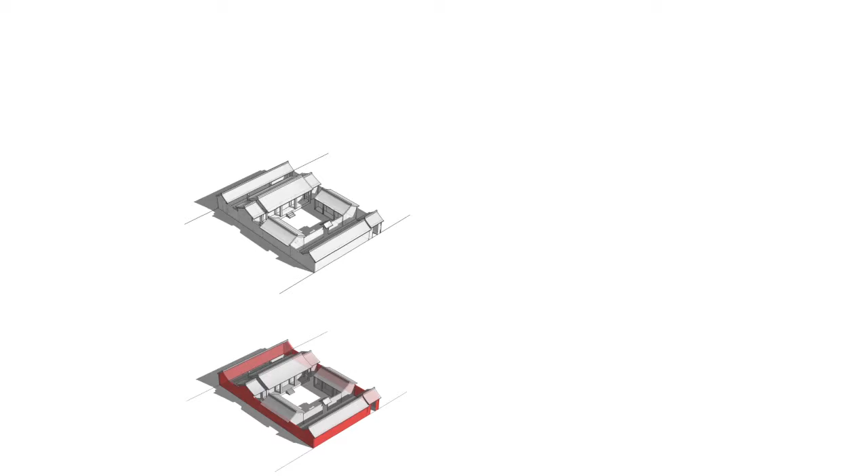Yet if we look at this fabric more carefully, this is the hutong today, and even compared to the 1750 Qianlong plan of Beijing, it's difficult to find this figure. Can you find that perfect rectangle? The urban fabric of the hutong was not and is not a replication of rectangles as units.

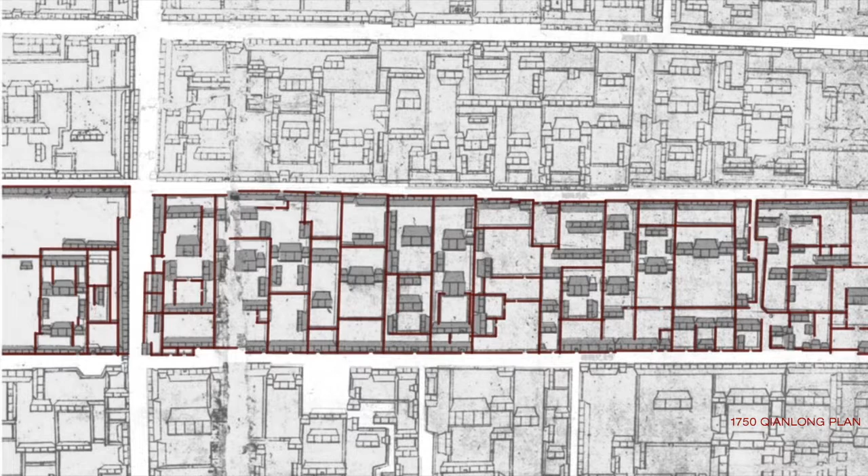It is a field of pavilions organized in relationship to sunlight, then infilled with walls that shift over time to form family compounds in relation with neighboring compounds. This organization for sunlight is a loose or open relation of pavilions. Regardless of how the garden walls are changed, sunlight always enters the fabric.

As a field, this reflects the reality of the ideal family. It reflects that the ideal family was not always possible, and in fact, the compound walls could shift to accommodate the changes in lifestyle.

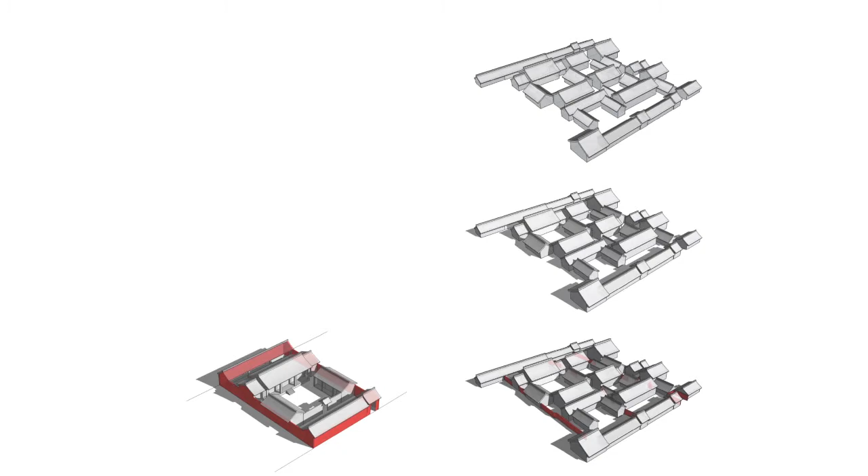The city's urban legibility is informed by these open fabrics. Despite the wall-lined streets and alleys that characterize old Beijing, Beijing is easily navigated through a directionality of longitude and latitude and in relationship to city center.

This strong directionality is formed by the courtyard fabric, which expands easily in the east-west direction, but must be more frequently interrupted in the north-south direction.

The lesson? There's a reciprocity, a relativity between the smallest unit of the urban fabric with the identity and legibility of the entire city. There's a reciprocity between public and private realms, and between inside and outside.

These are critical field conditions that we are losing the competency to design, and for which our urban design tools too frequently ignore.

Shanghai. What we see now is a move towards the design and development of the components of our cities. The buildings, the parks, streets and highways, they're all becoming objects. The debate about figures and fields accelerated in the mid-20th century, of course.

In response to urban fabrics which had become overcrowded and unsafe, CIAM produced a manifesto for rational cities in which streets were hierarchic and functions were segregated. Dwelling was isolated in towers and distributed within parks to ensure that urban centers could be both dense and sunlit.

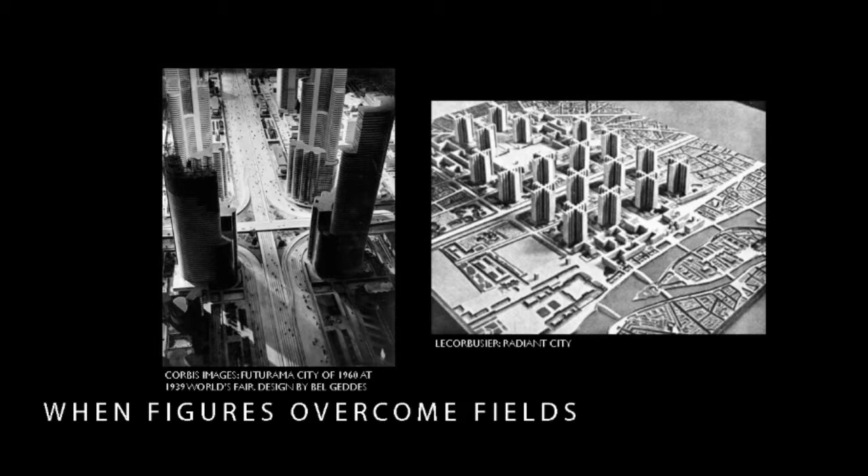The lures of mass production, automotive and building technologies, coupled with the imperatives of health and safety, overrode the concern for urban legibility and locale.

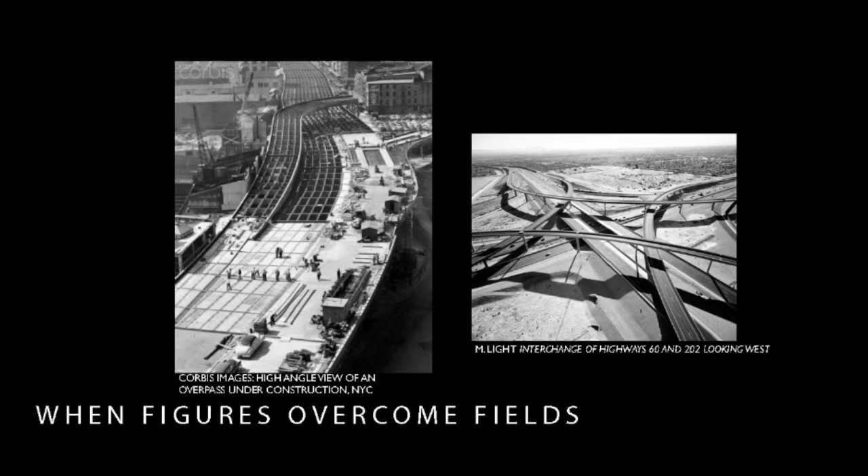This tabula rasa approach has been adopted by generations of architects, planners, and policymakers, especially during waves of large-scale reconstruction, as evidenced in post-war America and today in contemporary China.

There was, of course, a backlash to this approach. With CIAM, the disagreement about the charter led to the emergence of Team 10. In the United States, Jane Jacobs put forth her famed rebuke of modernist planning principles.

In her book, Death and Life of Great American Cities, the very first line reads, 'This book is an attack on current city planning and rebuilding.' She used New York as her primary case study, deriding the figural monotony, fragmenting boundaries, and the loss of the fine-grained and diverse social and economic complexities necessary for a healthy city.

While the debate over what constituted good cities continued, I think the culture of object building evolved. A convergence of immense concentrations of capital, an assumption about cheap energy, and vertical technologies fostered a building culture dominated by icons to corporate and individual wealth.

In 1978, Rem Koolhaas also used Manhattan as a case study to describe urbanism and what he called its terminal stages. Terminal stages—it's the end game, it's like cancer. He said buildings were so large they become automonuments, even if they do not deserve such symbolism.

He described urban living as lobotomized, splitting inside from outside, block from block, public from private.

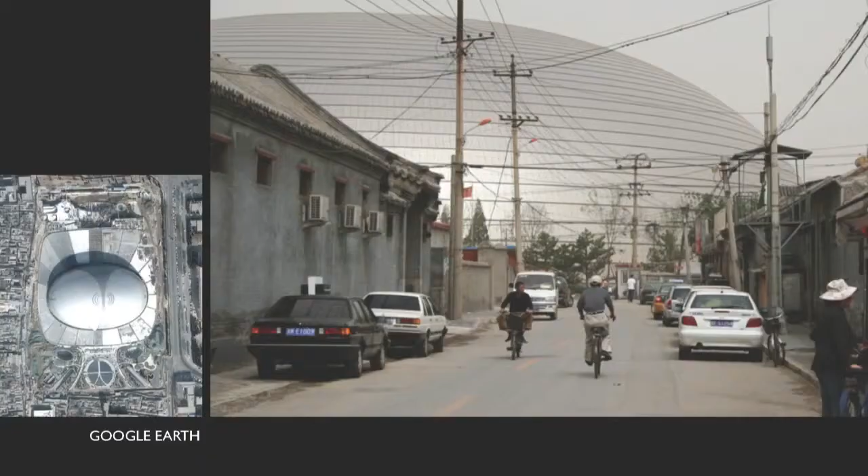So, while traditional settlements as fields emerged from cultural practices that no single identity could claim, 20th century development commodified building as individual brands. To overly caricature: governments wanted monuments, corporations wanted icons, architects want recognition, and developers want brand identity.

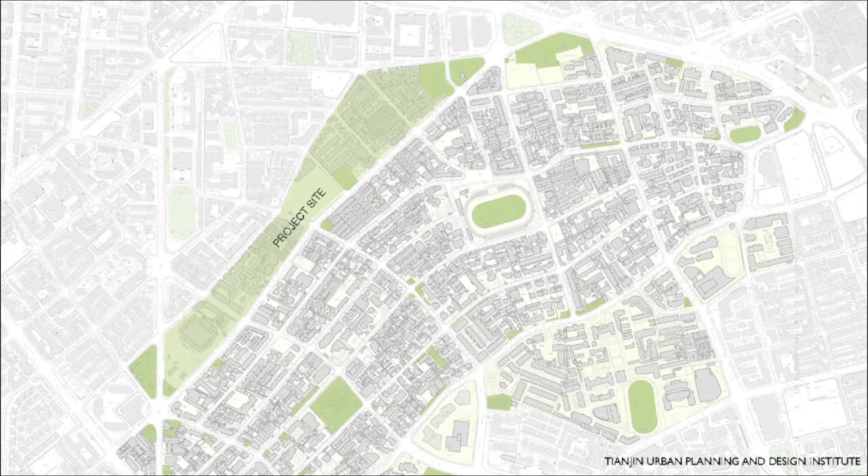The goal was to develop an urban fabric that reinforced the legibility of the city, that served as a transition between the historic district and the urban towers that surround it, and that revitalized the historic district with mixed-use activities.

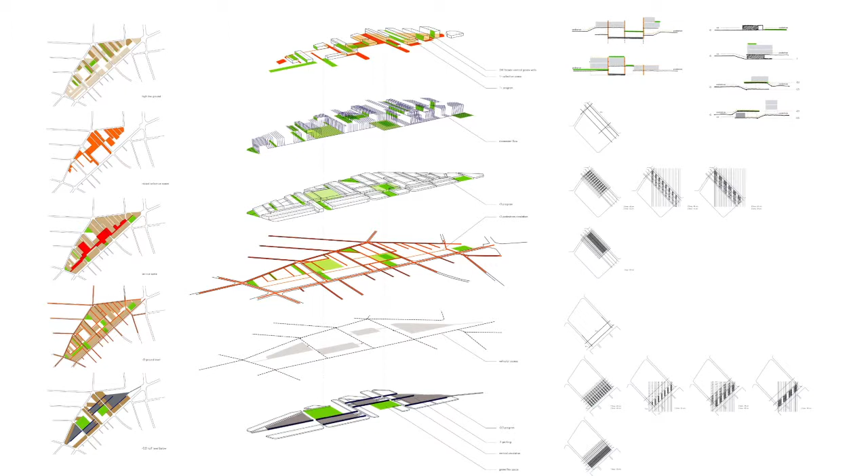In this case, what I'd like to illustrate is how relations were described and used as design parameters for collaboration among designers. The experiment benefited from having 14 willing designers prepared and inclined to use systems to describe relations between their individual designs. In developing the parameters, every system of the field was a configuration overlaid on other systems.

You're looking at some of the initial studies. We began by assuming that any urban armature should begin with passive strategies and then apply technologies, and that every system operates in an optimum that differs from other systems. So our ambition was to integrate systems, not make them closed loop.

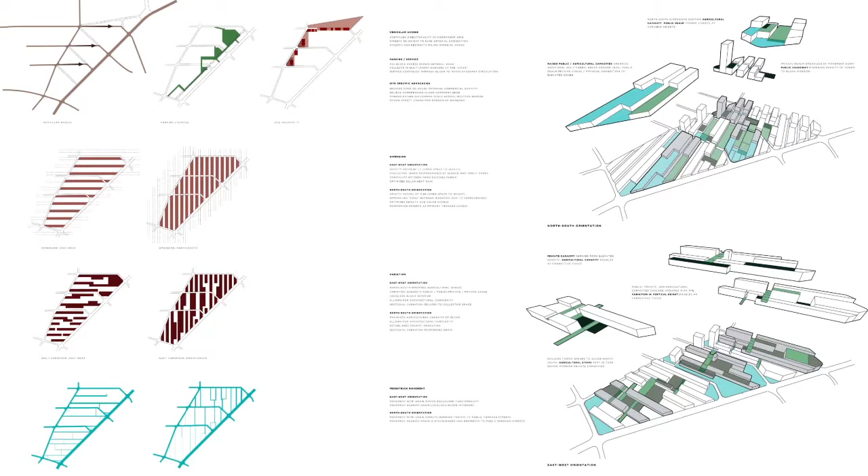Here's what we came to agree on as the key systems that were the initial starting point for the design guidelines. Very simply, they were walls, water, wind, and sun.

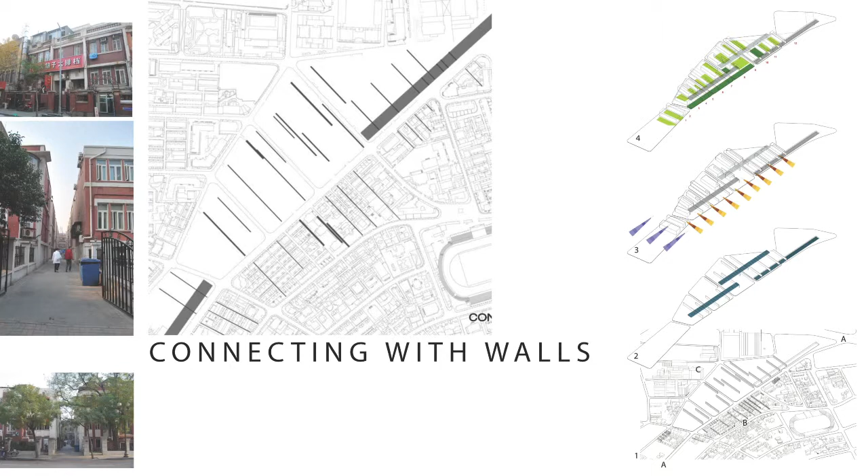First, connecting with walls. In Wudadao, we extended the walled characteristics of the historic fabric, which is to the bottom of the image, into the site. A field of demising walls, long and short, in the historic fabric are extended onto and transformed on the project site as a field of wall zones. These are some of the design interpretations.

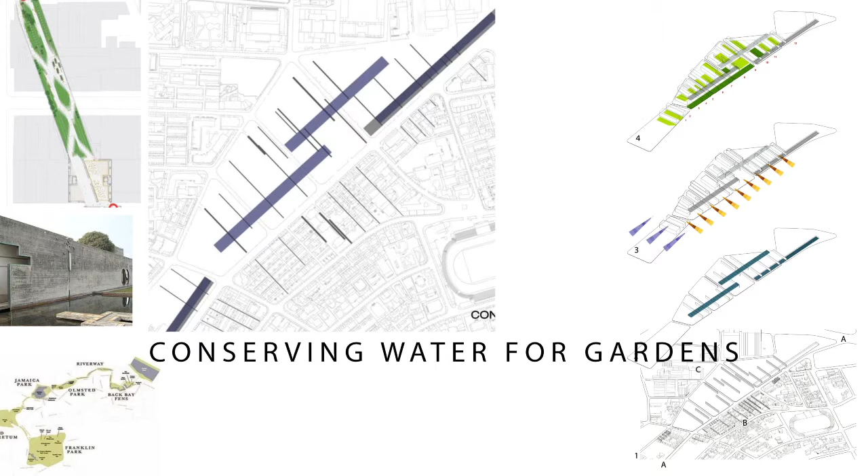Next, we looked at stormwater. Tianjin receives 70% of its annual rainfall during the summer, so flooding and water shortages are a recurring pattern. Remediation through in-ground water systems is made difficult by impervious soil conditions. As a result, stormwater is managed above ground at multiple urban levels.

An elevated collection system provides a new ground for activities internal to the site that could be developed as a green belt from the retained water. Again, here are some of the design interpretations.

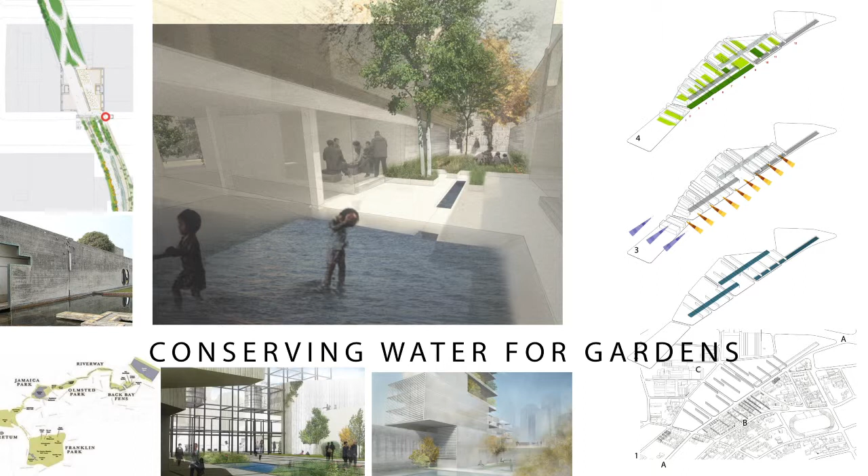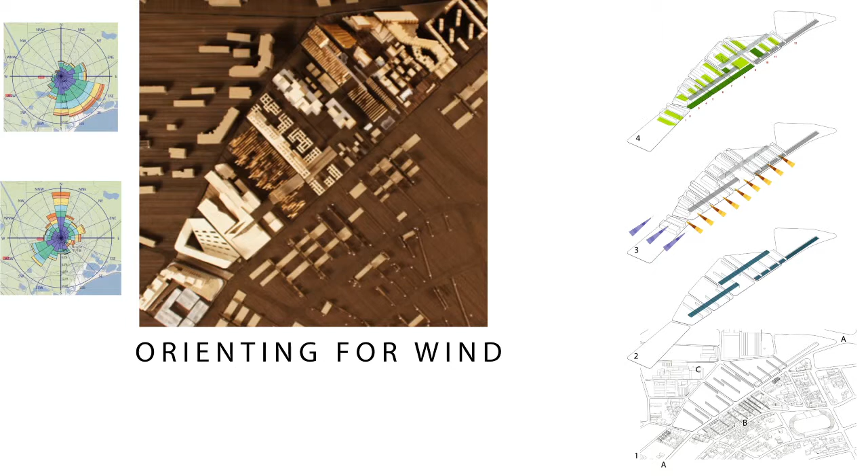Another goal was to provide natural ventilation across the site, ensuring summer breezes and blocking winter winds, especially to the residential units. And last was permeability of sun.

Revitalizing Wudadao required increasing the number of people living near the site. Therefore, a large portion of this fabric needed to be residential, requiring that parts of the site meet the Chinese sunlight code. On the bottom, you can see the sunlight intervals that were introduced, where building masses were paired with shadow zones, so that each designer was responsible for the shadow his or her building cast on the remainder of the site. The more impervious the building, the less ground development was possible.

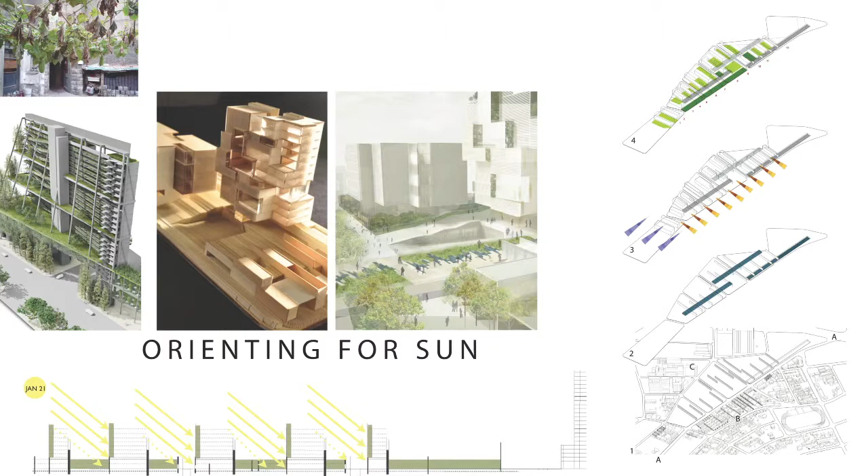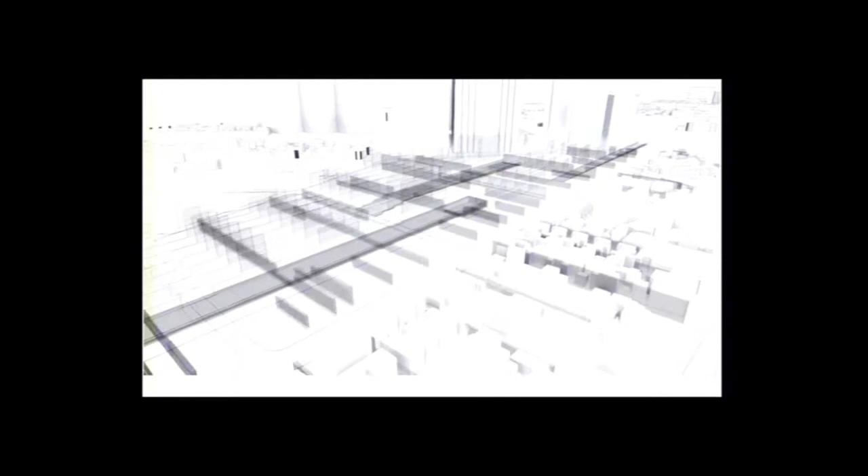With the field parameters in place, designers then worked individually. In fact, they barely talked with each other because we had hardly any time left in the semester. But very quickly, and with very little need for discussion, the major continuities of the site emerged with what I think is a finely woven integration of public and private spaces, where no space was left over or unused.

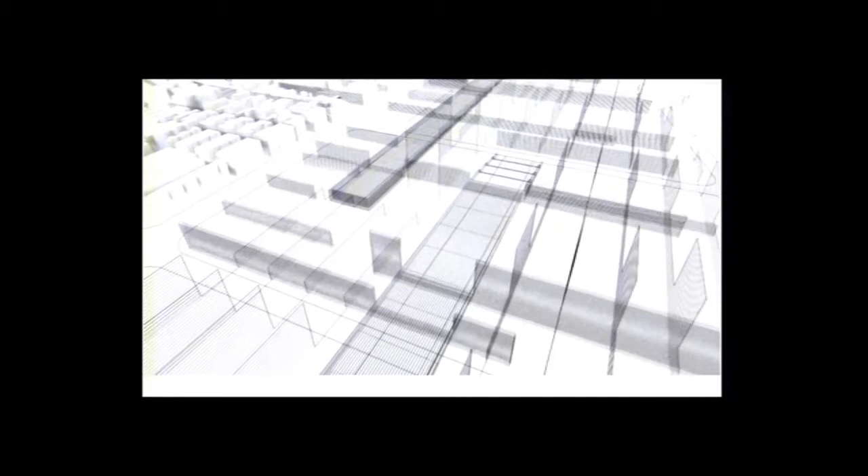My second illustration is a canal village on the outskirts of Shanghai. This was a competition sponsored by the Shanghai Qingpu government.

The competition brief called for schemes that would bring back the awareness of natural evolution of man-made habitats, inspire a new paradigm of city development, one that is neither urbanism nor suburbanism, and provoke, and this is my favorite part, a dialogue between Chinese heritage and contemporary living.

For a nation that's been busy destroying large parts of their urban fabric, it was a relief to hear that they were interested in trying to maintain that.

What I'd like to illustrate here in relation to the potentials of field urbanism is how to read a locale, its heritage in this case, and extend its lessons to build contemporary urban fabrics.

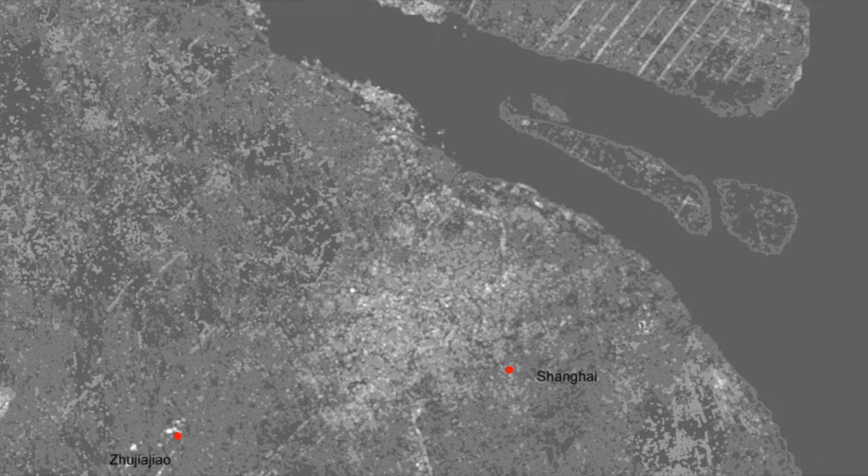Like Shanghai, this project site sits in the Yangtze River Delta. To make productive agricultural fields from these flood-prone lands, the region is a system of ponds and canals with dikes and levees to control drainage and provide irrigation.

The land is divided into long, thin parcels that radiate perpendicularly from the edges of the canal. It is a low-tech, decentralized system, doesn't require lots of maintenance, and enables good overall agricultural and drainage performance. It's been working for centuries.

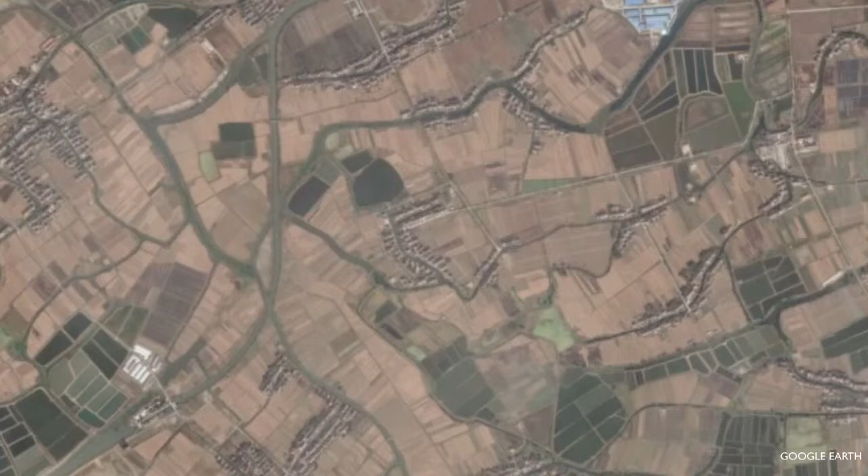A distinctive group of towns and villages has grown out of this landscape. Zhujiajiao is one of these villages. As metropolitan Shanghai develops, this landscape now faces the pressure of suburban development, all too familiar.

By now, I hope it's becoming explicit that we need to be able to read local relations as systems. This affords designers the knowledge and tools to both connect to and extend the unique urbanism of a place, and to describe the interwoven and nested interior quality of a fabric.

What this project will show is that urban systems and architectural systems need to be mapped as a thick mat, as overlays both at a variety of scales and at the same scale. So here are a series of mappings of the historic center.

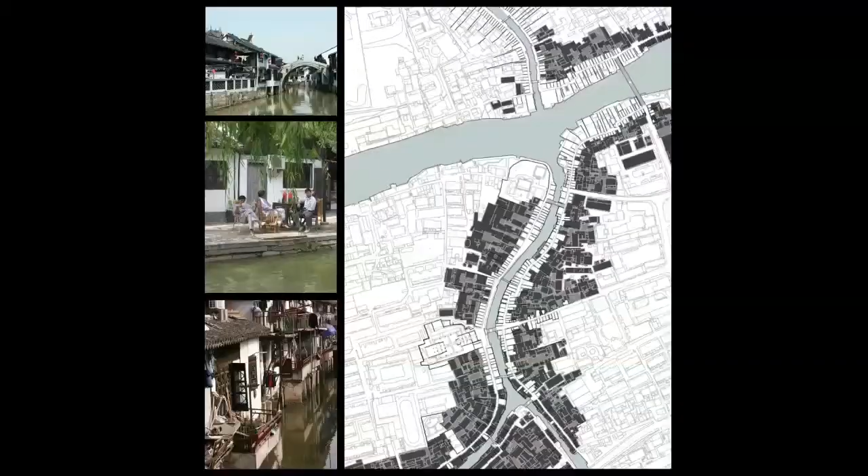This illustration shows the public perception of the village, much like the Nolli plan of Rome. Here you see the party walls that are direct extensions of the levees that radiate from the canals.

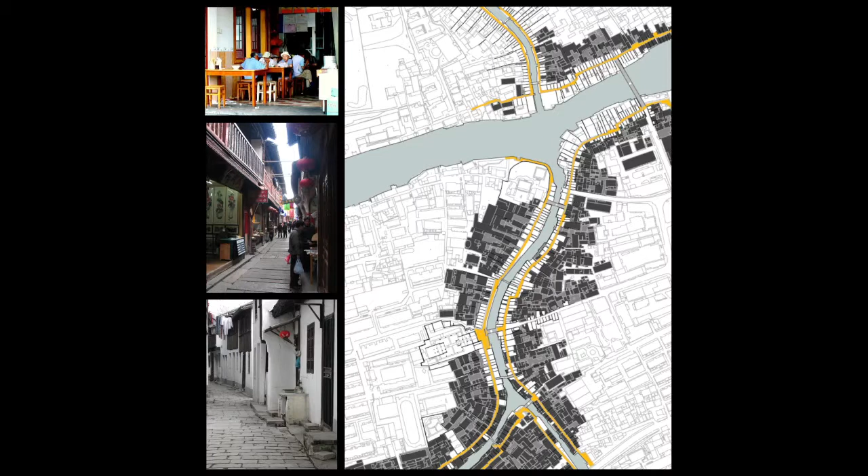Here in yellow you see the public access highlighted, and you can see that public access runs parallel to the canals.

This is the residential access. It runs perpendicular to the water, along the party walls, through an alternation of buildings and courtyards. So the residential experience is very much to and from the water, public experience parallel to the water.

And deep in the fabric are the large houses and temples, the buildings that are distinctive objects or figures, yet integrated into the fabric.

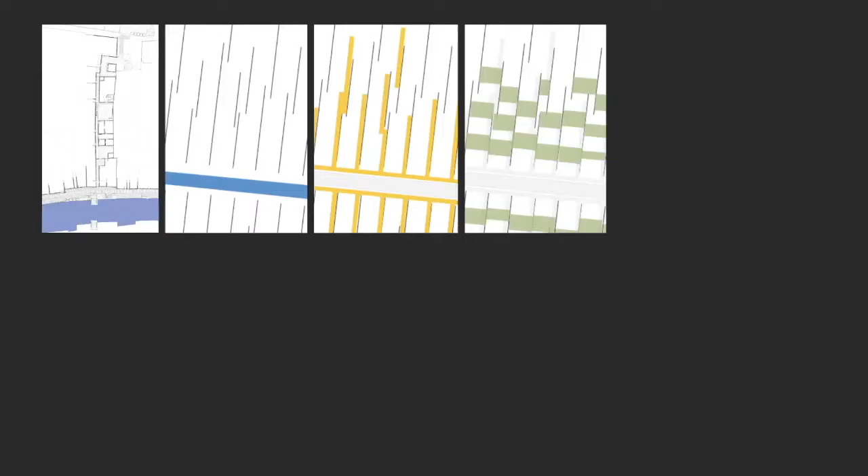Here's a set of diagrams exploring the same set of systems at a local scale. Our design goal is to introduce contemporary ways of living by extending, transforming, and adding spatial practices that are unique to this landscape. Again, I'll just show this looking one system at a time.

Here what you see is the primacy of water. A new dwelling fabric needs to maintain the stormwater pattern of the region. The walls are extended as zones and the increments are widened to accommodate new densities. Major public access continues to move parallel to the canals, and the neighborhoods and their access continue to radiate to and from the water.

Sunlight in the historic field is a checkerboard pattern, ensuring sunlight and air in what is a very temperate climate. What we discovered is the same pattern fails when we had to increase the building heights to change the density.

So in this case, we had to transform the built and open pattern into alternating strips that met the Chinese daylight code. The preference for south-facing housing is provided at the scale of the unit rather than at the scale of the building. And then new services like parking, fire access, garbage, servicing were layered into the field to intensify the experience of the water.

This scheme introduces servicing as a topographic system, again a new elevated ground. Community activities take place on the new ground with parking located below.

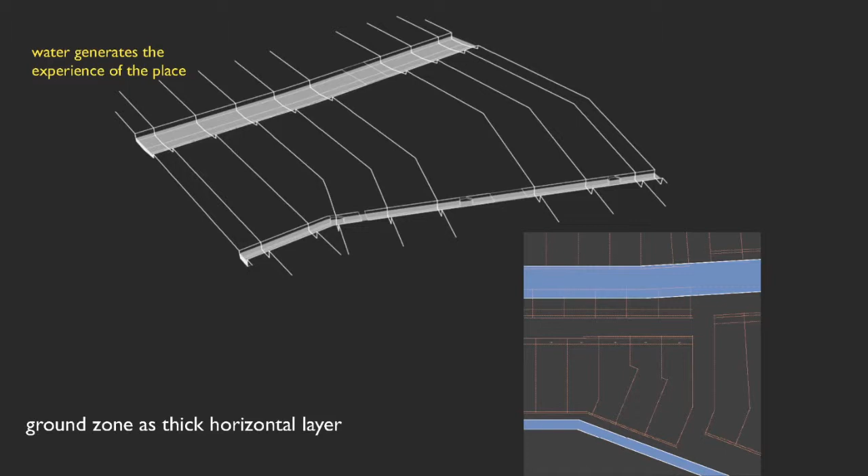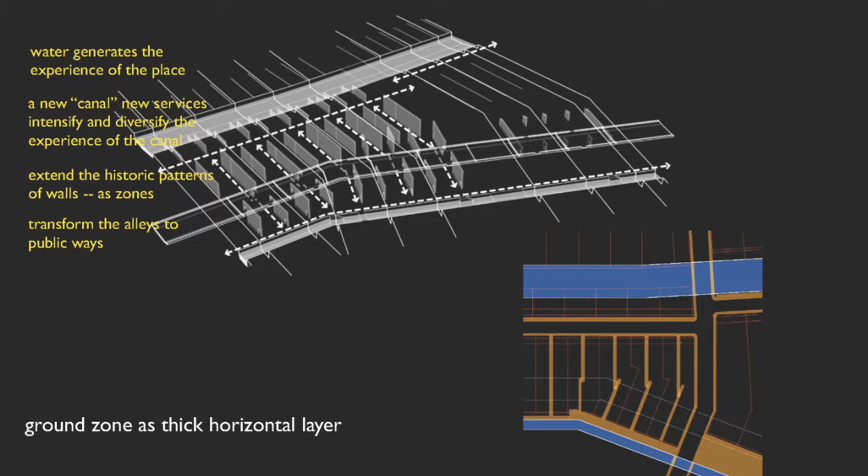One, there's a multiplicity of systems that connect local with extended sites. Two, the systems are a thick mat that describe the reciprocities between large and small, public and private. The systems then are guidelines that allow building form to emerge, describing the key attributes to be shared, but provoking variation, both for initial collaboration and over time.

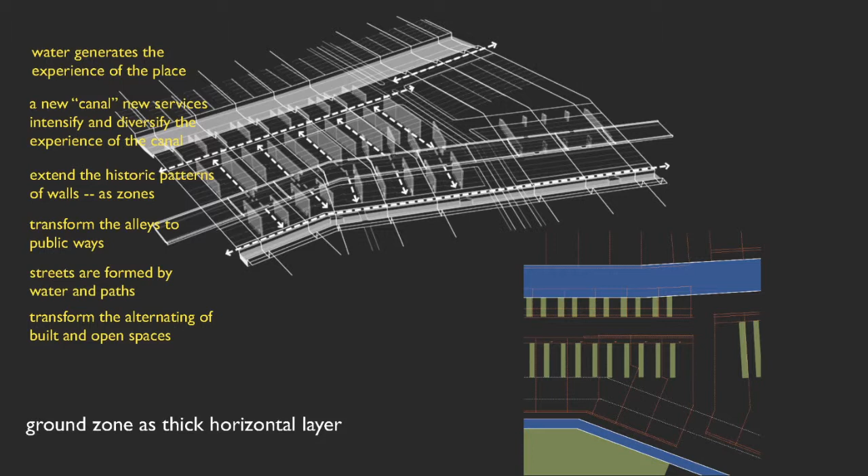As a result of describing the relational conditions and masses at sizes smaller than the building, we were able to develop an urban fabric, one with richly woven experiences at all sizes, integrated with the water system of the landscape, offering variation and choice for the resident, and allowing designers to do more than decorate the outside and fill out the inside.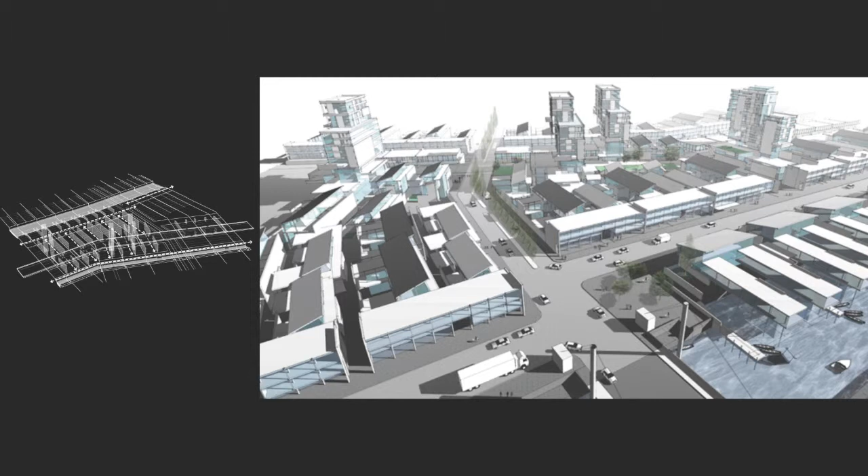The last case study is in Hanoi. You'll see the work of two teams of students for a competition sponsored by the National University of Singapore as part of their Vertical Cities Asia competition. The intent of the competition is to develop new paradigms for high-density living. In this case, they set a goal of 100,000 people in 1 square kilometer with a theme of urban farming, and a site, unfortunately, not in Hanoi but on the outskirts of Hanoi, so it's a greenfield site.

While there's not enough time to go through the details of the project, what I'd like to illustrate with this last case study is the reading of relationships already embedded in the control of water, again in an agrarian landscape, and their transformation into relational design parameters.

This time I won't describe all the field parameters, but instead the resulting form and how the systems underlay the urban fabric.

We began the project developing both the quantitative and qualitative metrics. What did the numbers of the brief mean in relation to known places and the culture of Vietnam? We discovered that the numbers, 100,000 people in 1 square kilometer, did not imply that the form of the city had to be in vertical object containers, and that strong horizontal development was possible.

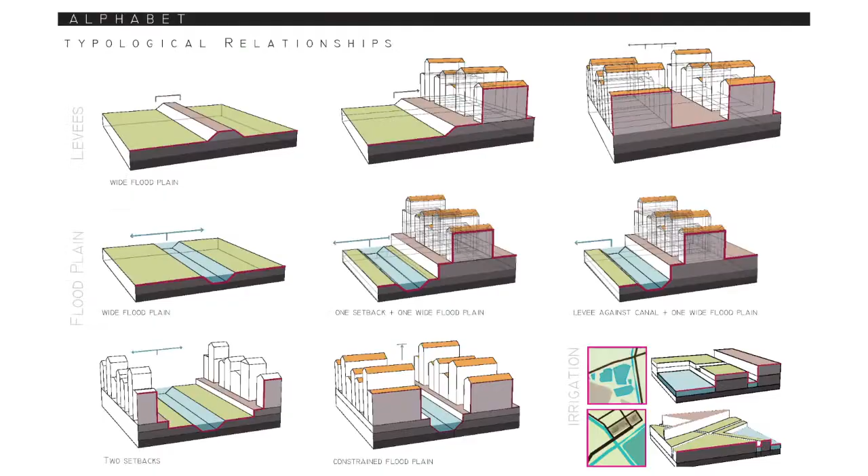We studied the form of housing in the rural landscape as well as in the city. We looked at crops and the food chain. We looked at stormwater, the control of the flooding, the watershed, and the existing agrarian systems.

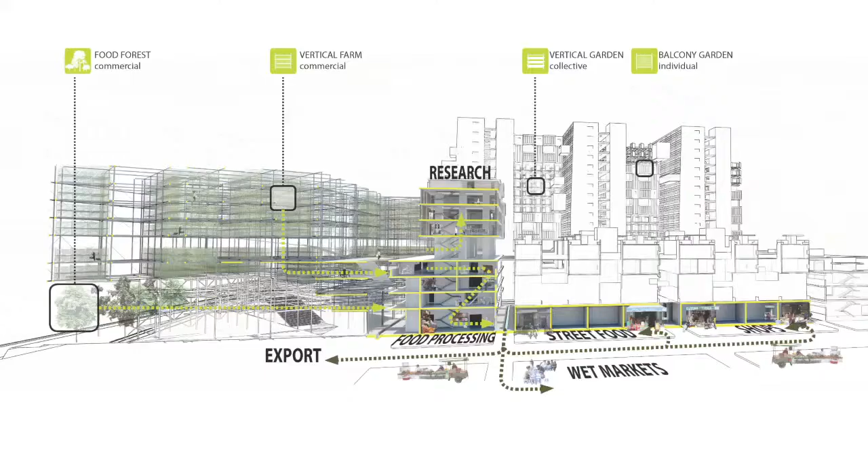With all these examples, I hope I've illustrated alternatives, both representational and systemic, towards designing good urbanism through using fields as well as figures.

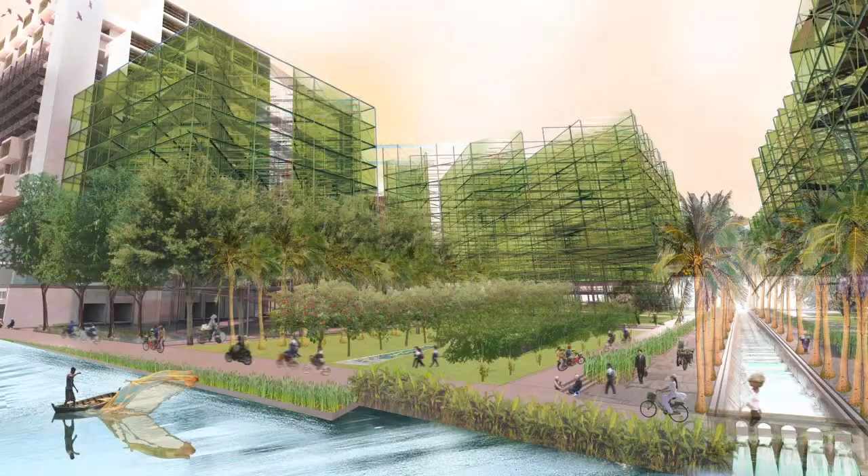Aldo van Eyck said, good urbanism is when the experience of the city makes you feel inside, even if it happens to be outside.

We need to consider the impact of design interventions at all scales, from the largest to the smallest. In this way, no space is left over, a no man's land between built projects. I believe good urbanism is local. It's about being somewhere, not anywhere.

I'd like to conclude, since I knew I was first today, with questions for the rest of our speakers and for you as students of urban design. At least for us, these are the questions that emerged from these projects we worked on.

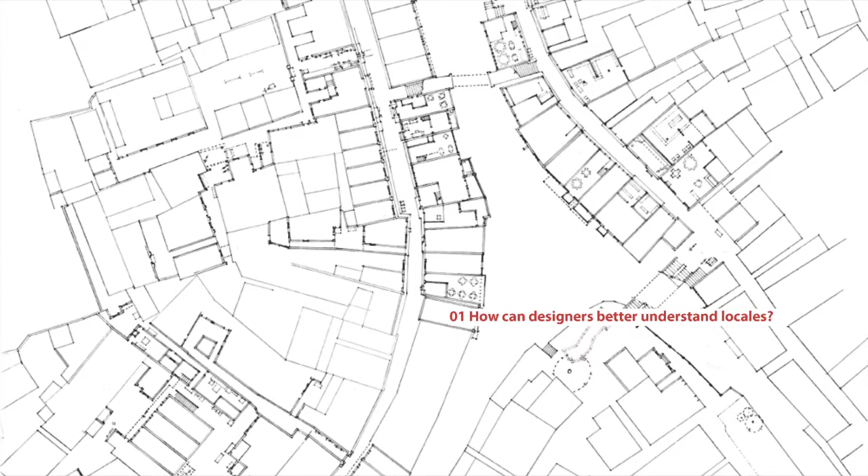One, how can designers better understand locales? Global practice does not mean the end of local differences. Since cultural practices are intertwined with the particulars of locale, what is needed are professional competencies in reading local conditions with the goal of connecting to that which makes cities unique, their identities and legibilities.

How does a connected, continuous inside character of place get developed? Horizontal relations and ground continuities are particularly important to bring pieces of a city together in legible ways.

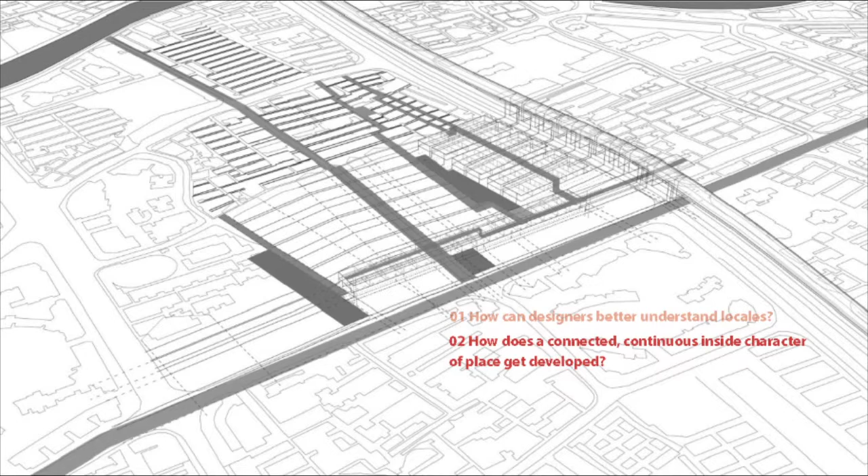This is not the ground plane, like a little thin thing that you see in the master plans with trees lining the streets, but it's a zone or a thick mat associated with the ground. It is what happens at grade, below grade, and above grade. This is the continuously shared experience of the city.

In urban design, large must be integrated with small, public with collective and private, the different efficiencies of repetition with the complexity of diversity, and the thematic qualities of identifiable places with the richness of variety.

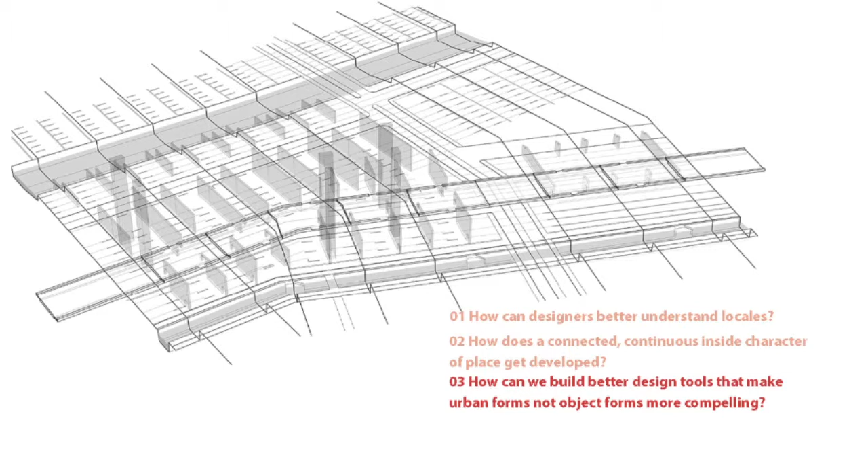How can we build better design tools that make urban forms, not object forms, more compelling? Our dependence on master plans that bifurcate the city between inside and outside, tools such as massing models, figure ground drawings, and street sections that cut us off right at the edge of the building, they're not sufficient.

Holding continuity solely in the public realm is also not sufficient. The private realm must also be integrated with the public. To understand how urban design is contributing to an extended setting, we need strategies to integrate urban and building systems that do not control by prefiguring architecture within building envelopes, but instead allow urbanism to emerge. This is a convergence of city relations with building relations.

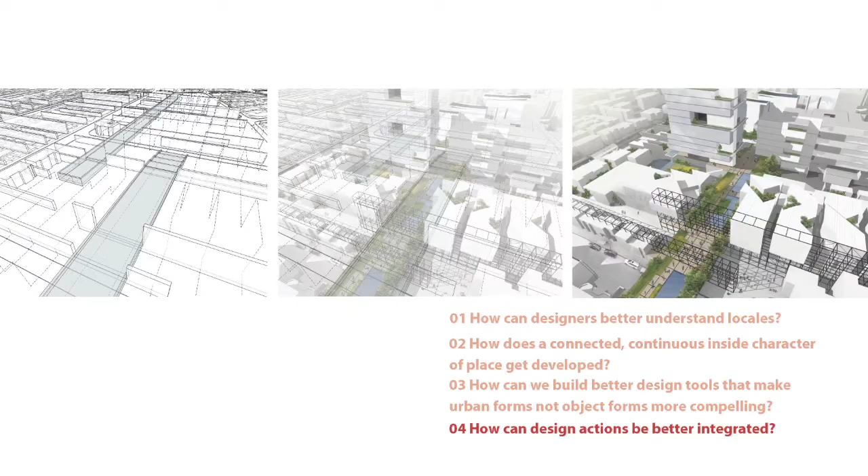And last, how can design actions be better integrated? With the disappearance of development through type, most super projects emerge from the hand of a single designer now, as a mega project, mega form, or master plan.

In a good design hand, this is a pretty daunting task. In lesser hands, this leads to repetition and uniformity. Alternate tactics are needed to coordinate and integrate the rich diversity and complexity that comes from multiple voices and agents that still hold coherence among the parts. Urban design should enable agency, both as collaboration and over time.

A shift or addition of a relational paradigm empowers the architect and architecture in city design. As we build more densely, we should expect to get more: a greater variety of ways to gather, new scales of building that decrease resource consumption, and a capacity to accommodate inevitable change.

So thank you. My lesson for today: look for patterns. They're everywhere.

Thank you, Renee. I think actually we have a little time, since you're so good to keep your time. So if there are any questions from the audience, that would be good to take them right away. Anything? They're just waking up.

Yeah, that's true. But you know what I thought was really interesting that you said? You said that no space was left over or unused. I think the notion of leftover space is what we are almost seeing every day, that how can we use that, and how to make sure that it's not over-designed, but to find a balance, that you actually need the space to be open space.